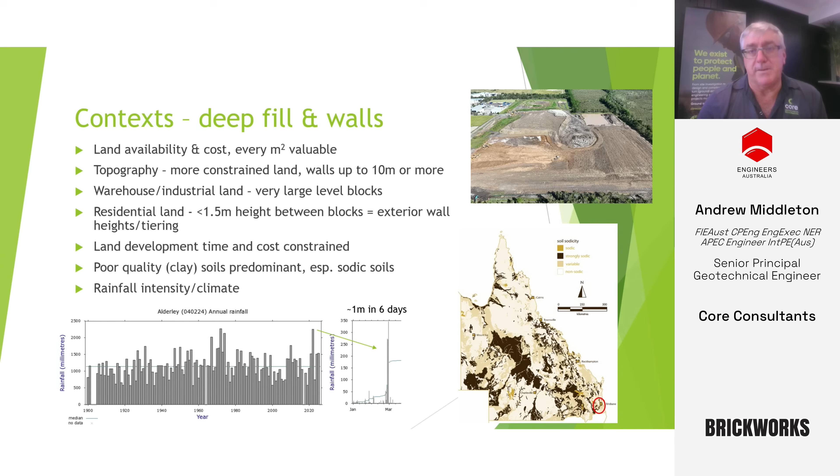So continuing to appreciate what it is we've got to allow for and design for, I would say don't get too comfortable - always remember nature. Nature's variable, and you just need to keep in mind those are the kind of things we need to be looking forward to. Design is about the future - they haven't built it yet, so we're looking a long way ahead. I think it's good to stay objective about this, and data is what keeps you objective.

In fill - typically you're building to your boundary, and we find that the land the toe of the wall sits next to is your neighbour's, not yours. So for walls in cut, the toe of the wall sits in your land in both cases, but in the case of cut, the land below the wall is yours. In the case of fill, it's not yours. This changes some things that you, your client, or your owners can practically manage in the future.

So the types of walls typically used are cantilever, sleeper, or post and panel. Obviously panels are becoming more popular than sleepers. More traditional, I suppose, is the cantilever concrete footing with blockwork or Dincel systems.

Your mass gravity walls - you can see a selection of those - come in either natural facing, cut sandstone, or in the case of Brisbane, granite. There's a significant granite supply available. Then you get your engineered walls with the big, large block format facing blocks. There's a number of products out there in the market, and then you get your mechanically stabilised earth - MSEs - the GeoGrid products, which go in combination with some or even potentially all of these, apart from sleepers.

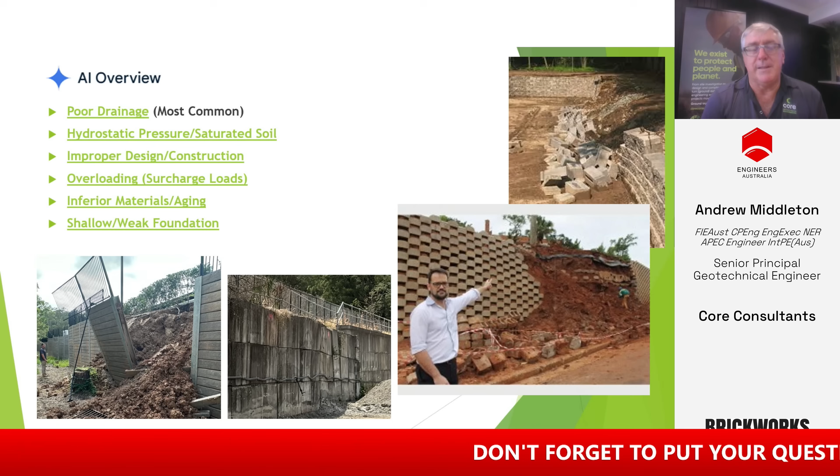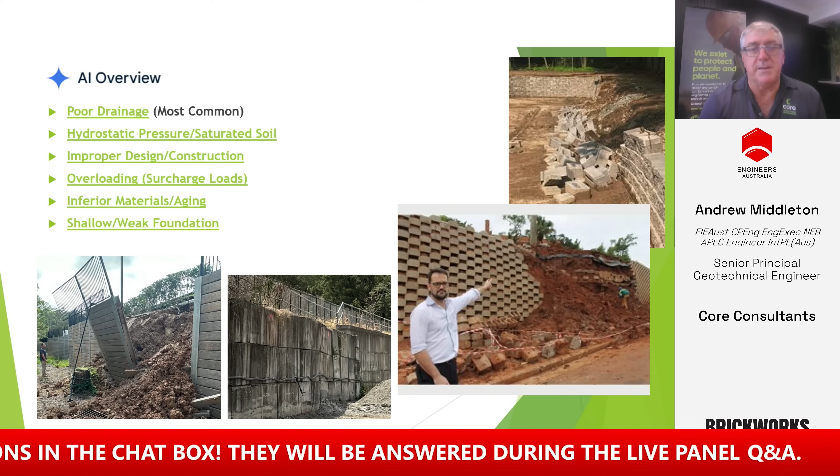You can see a couple of little failures there, and you can see the gentleman - that's actually not from Australia, and that gentleman is a politician, and you can see he's educating all of us about a big wall failure that's occurred. Slow news day perhaps, I don't know. Anyway, it will make the news, and we don't want that to happen.

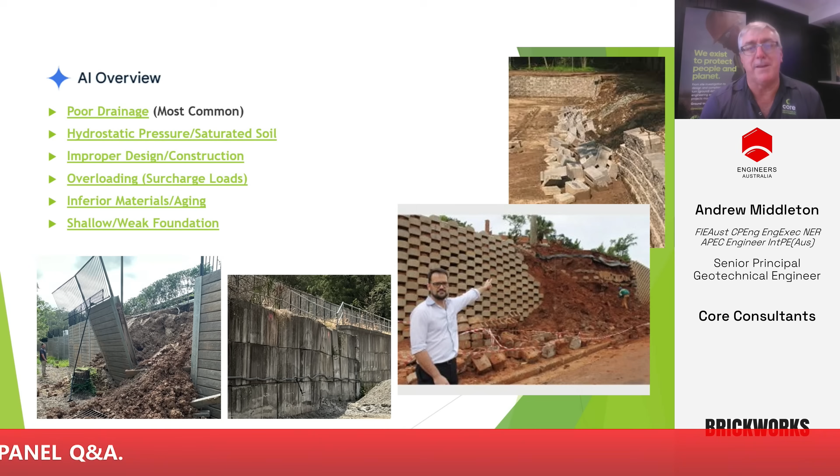Okay, wall design - AS4678 has a great summary. There's eight different modes you need to consider: 5 in terms of ultimate limit state, or failure modes, and another 3 in terms of serviceability. Wall design - I don't know too many other aspects of engineering that have so many aspects you need to consider. Wall design is not simple, it's not easy.

It includes an interaction between both structural elements and soil, so it's quite significant engineering work. As you get big walls, you get very, very big loads - I think these are amongst some of the most significant engineering structures that get built.

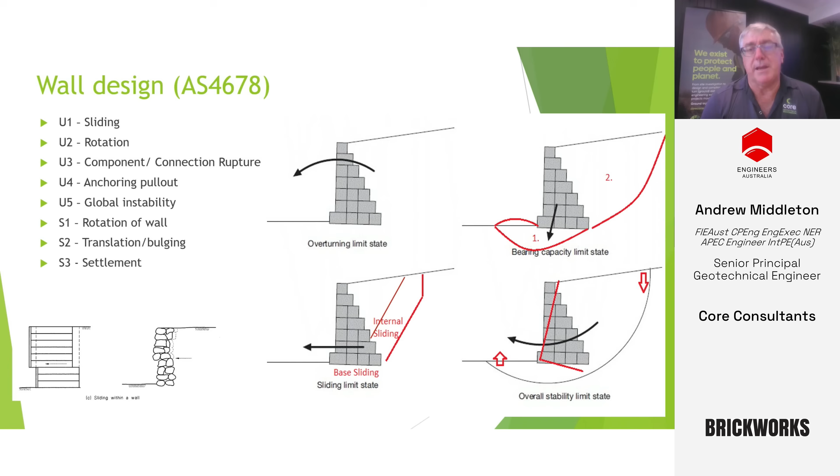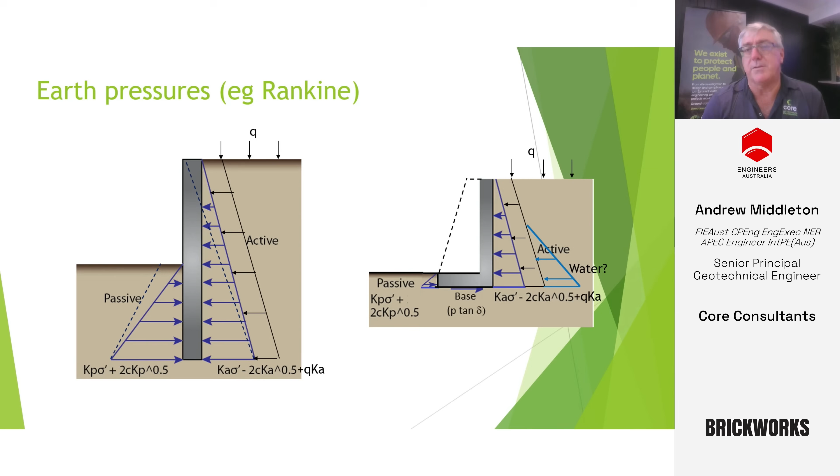Again, just basic earth pressure theory - passive on the leading side of, say, a cantilever wall, active earth pressure on the back, provided the wall can move. If the wall's restrained from moving, you'd use at-rest pressures, which are higher. There's an increase due to surcharging and whether or not there's water. At a high level, typically for mass gravity type walls, you've got sliding - nothing new there, just giving that summary to look at what we've got.

So one of the things about failures is we often get to do testing, and my guess is it's 10 times the testing you would do for the original investigation and design.

So again, as I say, we have to be careful about judging others in retrospect, because with the benefit of both hindsight and lots of testing, it's easy to do that.

I'll just note this is an issue certainly for Queensland tertiary soils in Brisbane, or tertiary rocks, very poorly consolidated, fissuring and micro fissuring type blocky structure means you get very low cohesion. Just have to be aware of that.

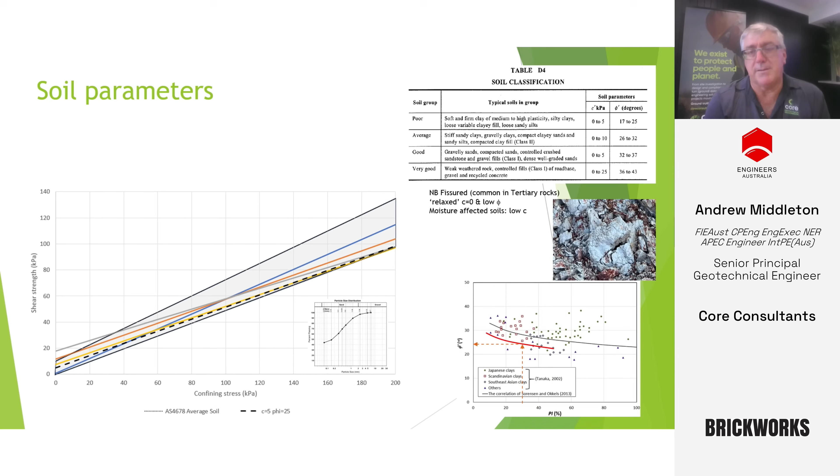Obviously, if soils get wet. The other thing we're able to usefully learn from this project is there's a correlation from Sorensen and others on friction angle with plasticity index. What we've found is that for us, at least in our Brisbane soil, it slightly overestimates. But again, it does show there's a reasonable field correlation there. Not a bad way, if you've got data, to start to make some reasonable estimates. So obviously, the table from AS 4678 is always a good guide. Wouldn't go far from that at all.

A lot of embankments, a lot of cut slopes stand up in the short term because of these suction pressures. But of course, as water becomes available potentially to that suction, the suction will draw in water, the suction will dissipate, and there'll be a loss of that apparent strength, apparent cohesion with that, and you need to account for that.

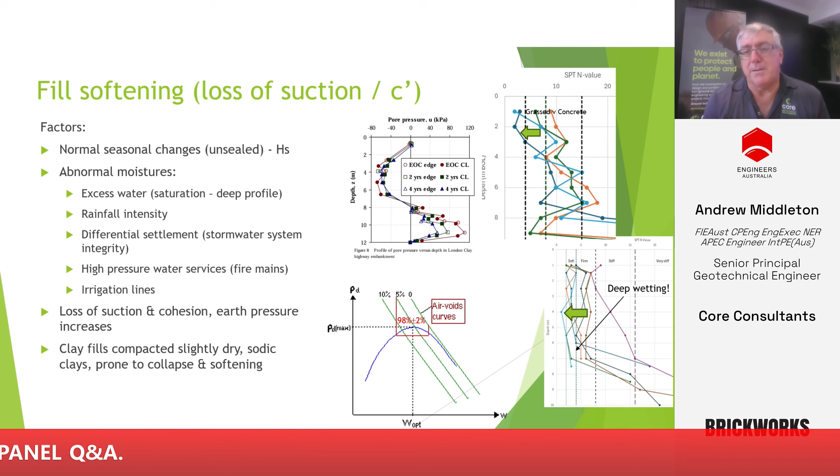Fire mains are a major contributor to problems in clay fills. Again, differential movement as earth pressures take up potentially leads to that. There are circumstances where there's been unmonitored water use in fire mains and significant volumes discharged over a period of many weeks, and it only became evident when the wall had a problem that something was going on.

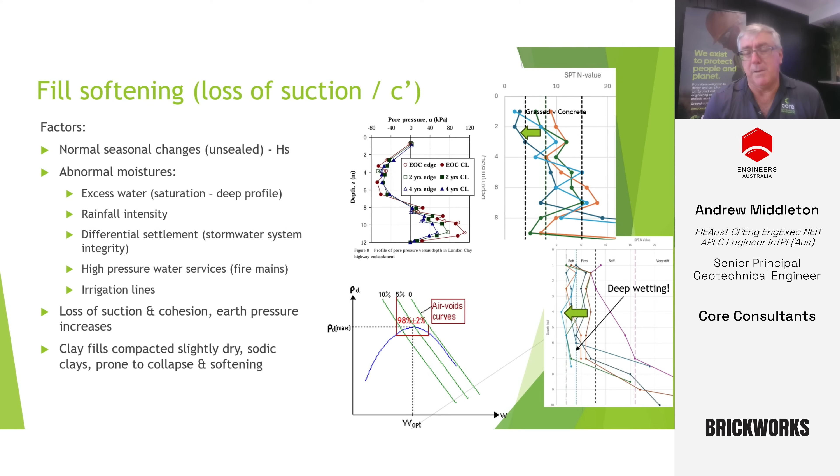As I've said, with increasing moisture, you get loss of suction and your earth pressures go up. You need to either reasonably allow for that or try to ensure there are measures in place that prevent it affecting the wall. I've mentioned the clay fills and sodic soils.

So for wall movements, we've got some really good data from a particular project where a 4-metre high wall moved. You can see the effect of the movement there—joints opened, the concrete moved away from the asphalt in the driveway. What's interesting is different parts of the wall moved differently. One end, which is the lower chainages, was quite stiff with very little movement. Further along the wall, it increased to about 0.5% of wall height.

What was also really useful is they monitored and took readings, as a very diligent client wanting to ensure they didn't affect their neighbour. We found it was about 100 days for those movements to fully develop—that's the dissipation of the soil suctions. In terms of earth pressure theory, that's the development from at-rest pressures up towards closer to active pressure, with the wall taking up movement and the soil relaxing.

So this has been really useful to show that walls shouldn't move more than 0.5% because of safety factors, but they can move up to 1%, and that's a real number, it will happen. Occasionally, if suctions are maintained, you won't see much movement, and you get comfortable with that, but you need to be aware that it does happen. It's a real thing.

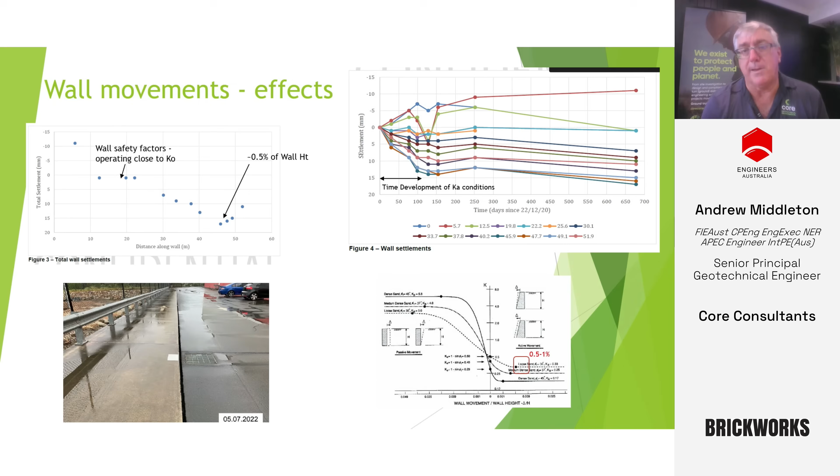With movement, stormwater pipes are prone to issues, as are fire mains. Stormwater pipes are bedded with bedding gravel and are large diameter, so they're essentially great big subsoil drains. We strongly recommend using an ag drain in the bedding gravel that discharges into access pits at the end, to the shafts. For blinding of that layer, if it's a high risk situation with potential to affect a wall, I'd recommend blinding as well, to help mitigate the risk of movement causing joints to open up.

Remember, vertical settlement will happen anyway—that's just normal. Well compacted clay fills settle upwards of 0.5% of their thickness, potentially towards 1% of their thickness. If the shaft is bedded at a different level to the pipe, you're going to have differential movement.

The other thing is the potential to use smart technology to monitor water use and have some sort of alert system. Maintenance people aren't necessarily aware of why this matters, but having alert systems that indicate, say, a fire system or irrigation system is using an unusual amount of water—and getting that to people who know what it means, investigating those issues quickly and dealing with them promptly.

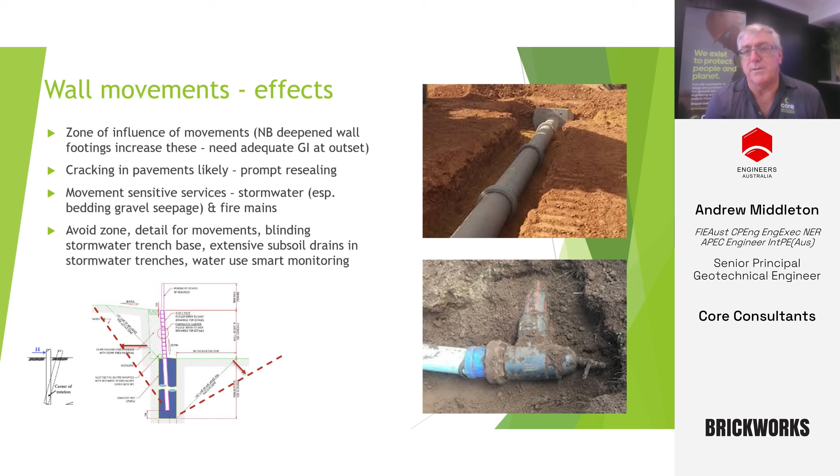I think the other aspect is ensuring that when there is movement at the surface—joints in pavements or opening up of joints in concrete—those are promptly dealt with.

It becomes really critical once you get above a certain size of sandstone blocks or boulders that you can practically manage with most machines, given the constraints of construction site access and truck movements. Once you get over about 4 to 5, maybe 6 metres, we find the statics really starts to struggle, and you've got to take other measures or really care to ensure this is actually going to work.

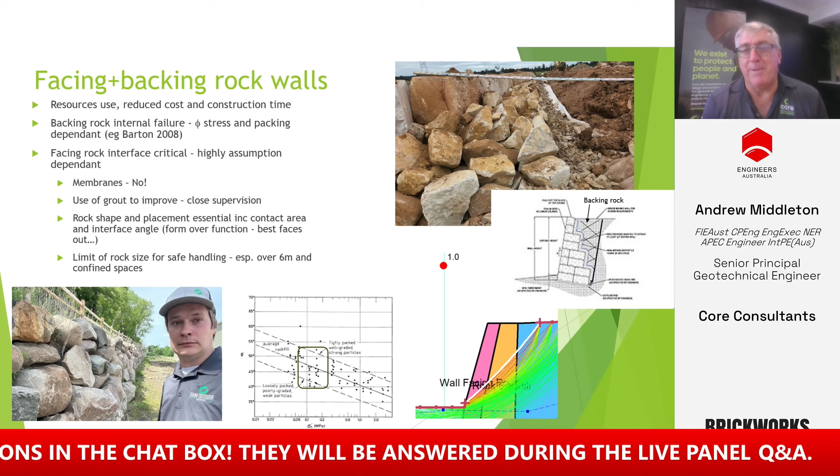There is an example I've seen where a geomembrane, HDPE, was placed between rocks. I probably don't need to say, but friction doesn't work very well on HDPE. I think that was kind of an obvious one, but nobody picked it up. And of course, it was found out pretty fast. Rain found that one out pretty quick. Fortunately, during construction, it was never going to last. So simple things like that you would imagine are obvious, but maybe not so much to others.

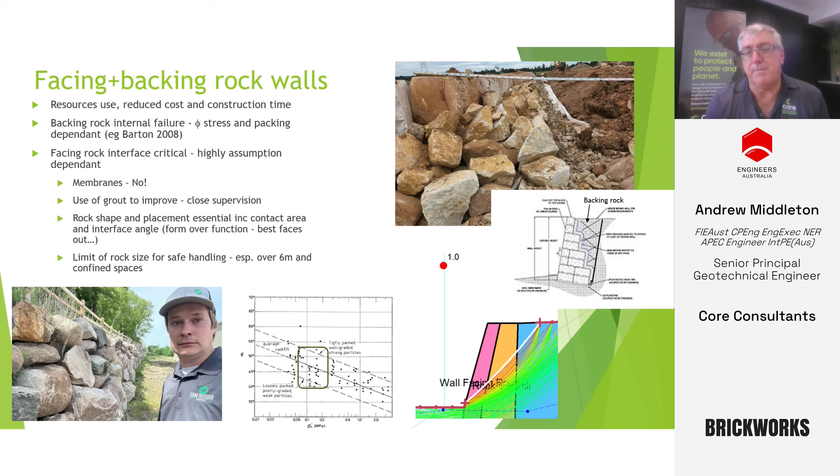I've also shared that I found Barton produced a good paper on rock fill density and friction angle, and it shows some variation for different confining stresses. Obviously you get higher stress—this is from rock fill dams. I found that quite a useful way to have a more informed decision about what parameters you should use if you're going to use this rock fill method.

Sodic soils are especially sensitive to this. They will also do that.

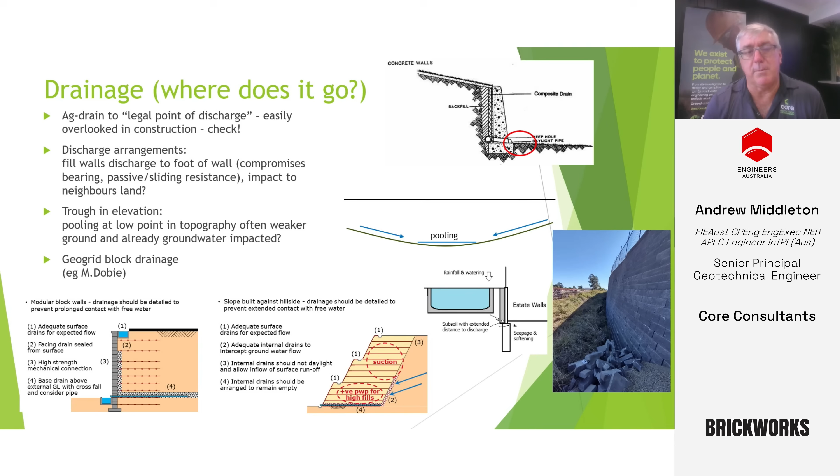Commonly, 150 or maybe 200 UCs are used, perhaps in a 450 diameter pier. The bending capacity of those is very low. And if you apply that into Broms' long pile theory, you'll find that the capacity of that pile is very, very small compared to the earth pressures.

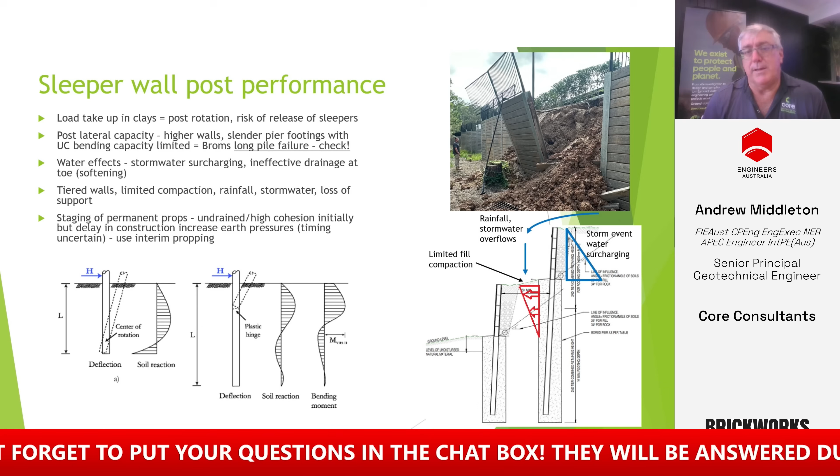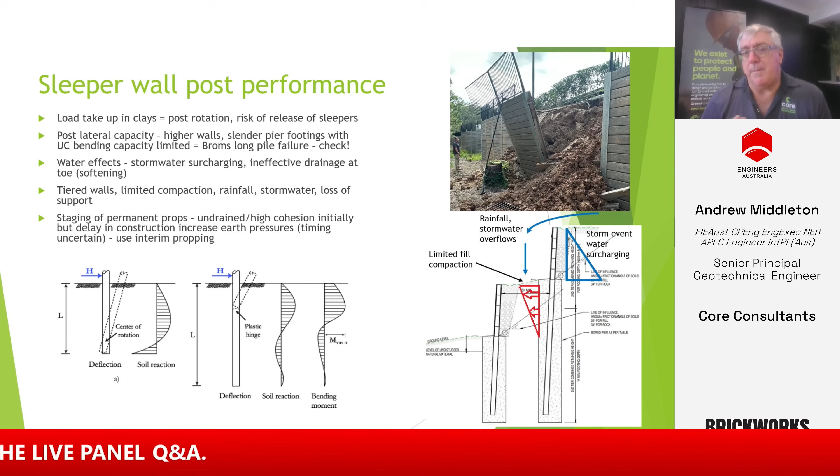Where this becomes even more of a concern is in a tiered wall, where the upper wall is doing a lot of work and may not be getting much support from the ground—the backfill behind the lower wall may not be very good. You can imagine what happens: the position of maximum moment moves down, the moment increases because you've now got a longer moment arm, picking up more earth pressure load. Things could go bad quite quickly in that respect.

I'm not a structural engineer, but I really think there needs to be more thought given to full cage reinforcement for these piles to significantly increase their capacity.

Tiered walls—the other thing we've seen is stormwater. A number of these walls have problems during construction, often because uncontrolled discharge of stormwater goes to the walls, down the back of the wall. The drainage systems behind the walls are designed for seepage, not for stormwater. Secondly, in a tiered wall, if it overtops, you're softening the ground in that middle tier, which probably hasn't had very high or effective compaction.

So with tiered sleeper walls, particularly that upper tier, don't miss it—really need to engineer that well to account for these kinds of conditions.

Another thing we've seen is a cantilever wall that has a permanent prop in the form of the slab for the structure from the pavement, using it as a permanent prop. But during construction, in the interim, no prop was applied. As delays in construction occurred, the wall—well beyond its capacity—the cantilever started to move, and emergency propping was needed. To me, if you need propping, you need propping.

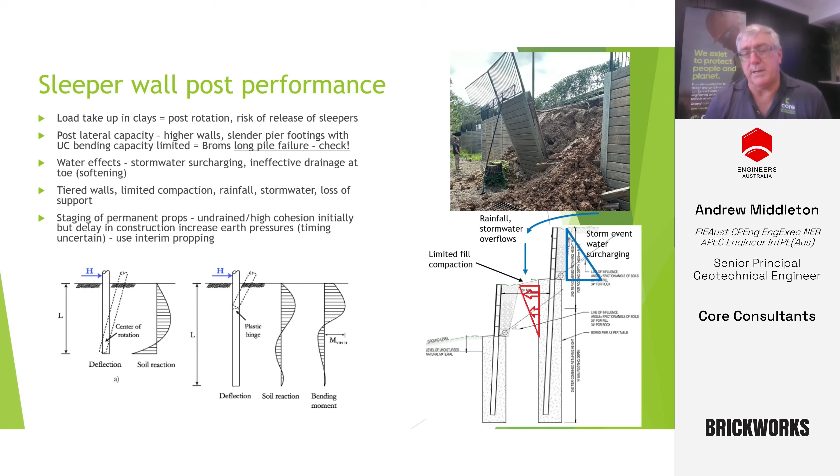So put in interim propping. I know there's an inconvenience factor, but you're probably talking about big walls, and what's a lot more inconvenient than propping is a problem with the wall affecting you or particularly your neighbour. So I think that's a case of be careful.

So just in summary, things I think are better practice principles: for drainage, understand where it goes and make sure it gets built properly. Don't have a lax view of diligence about that—it's such an important factor, it doubles the load on a wall. Earth pressure acting like water pressure isn't the same as earth pressure, probably more in some cases, so make sure you get that right.

Water services are critical, particularly fire mains and major stormwater. They are high risk—you need to make sure those are really thought about in detail. Move them away if you can.

If you can't, put in these other measures. Surface water during construction, as I've said, you must divert surface water and have arrangements to avoid the walls, as walls are not intended to cope with that. Sleeper walls, long pile failures, as I've just said, check them out. Make sure you're comfortable that you've got that covered.

Tiered walls, obviously numbers of issues there that potentially things that you can't control need to be in mind. Rock walls, again, the facing-backing rock method - I think practically there's probably limits to what's doable with what's sizable, and after which I would probably say think about going to engineered type block systems, geogrid, for example.

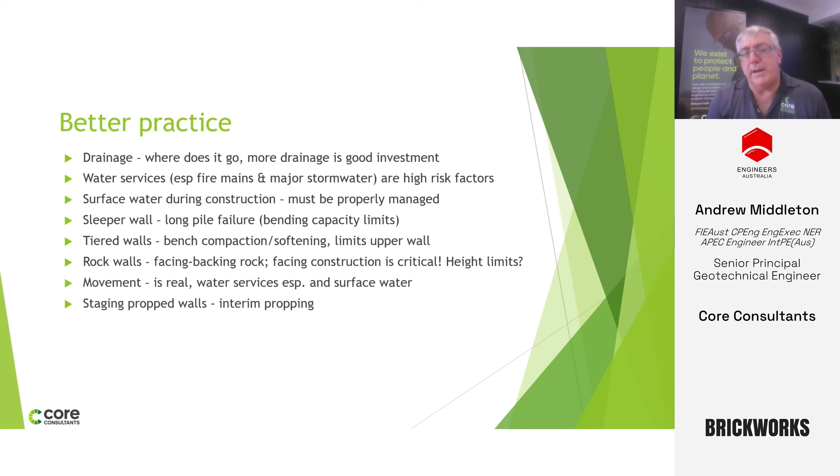Lateral movement is real, and again, settlement, compaction - looking at what you do to try and help ensure you've got better compaction around structures when you've got the wall and near wall, particularly back of walls. And again, the stage, as I said, interim propping.

Thanks very much for the introduction. I'll be talking about retaining wall failures today, talking a little bit about walls that are embedded into the ground, and an example here of a famous failure of a retaining wall in Singapore that happened several years ago.

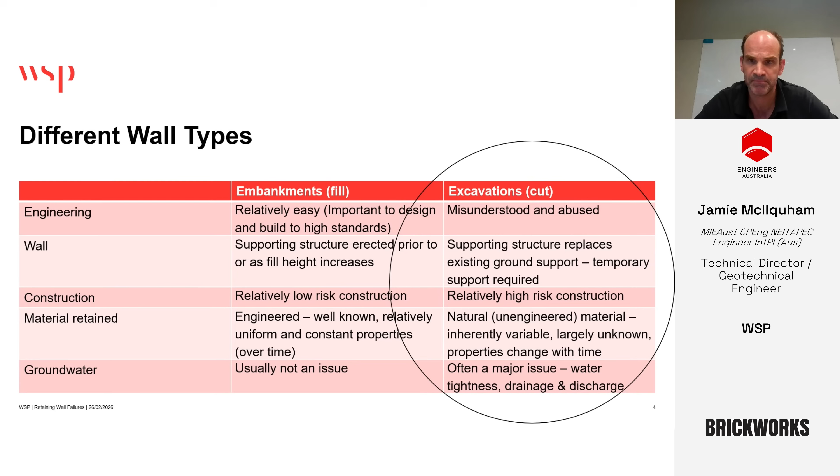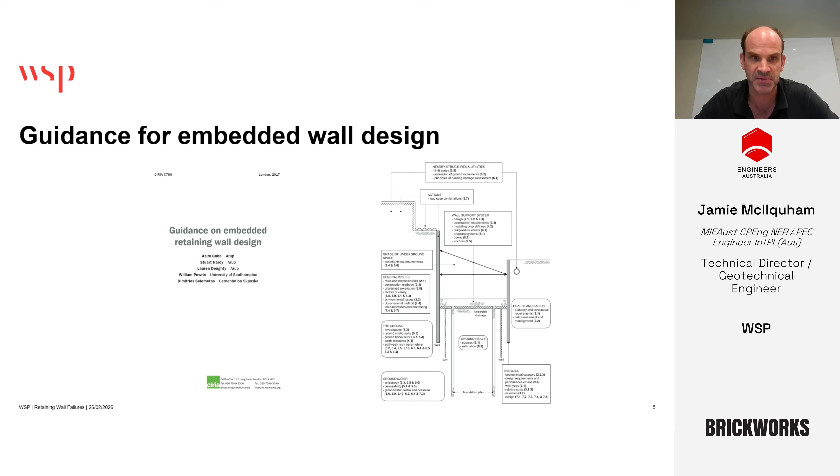There is very good guidance for embedded wall design. CIRIA C760 is a very good reference for anyone who is working in this field, and will cover in great detail a lot of the considerations we're going to walk through in this talk. So I'd certainly encourage anyone who's doing this type of work or wants to do this type of work to obtain and work through that guidance document.

As we've touched on already, embedded walls are a risky business. You are creating a void where the soil and water can move into it. And some of the failures that have occurred are a partial or full collapse of the excavation. There can be movement of the wall itself, and then if there's any structures or services near it, they can also move.

Groundwater inflow, depending on the ground you're in and the type of wall used, that can be something that can be pretty serious. And if water does start changing and you do have an impact on the groundwater regime outside the excavation, that can then cause other issues for any nearby services or structures.

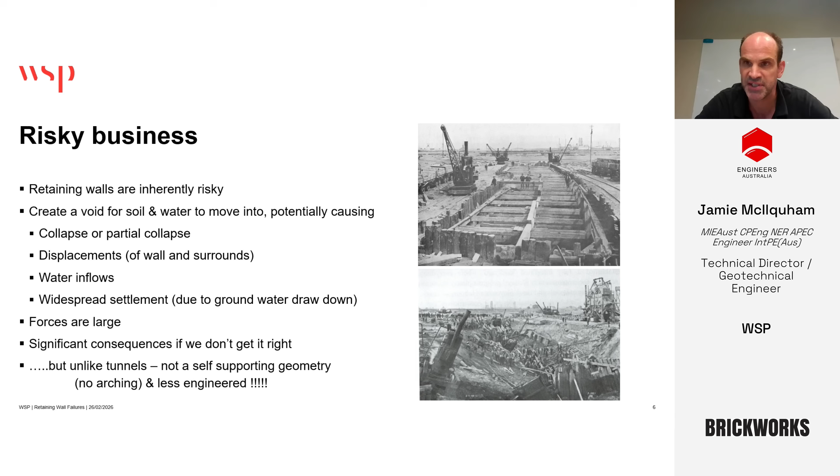So what's failure? It can range widely. There can be all sorts of different types of failures. It can be just unsatisfactory performance at any time in its design life.

But particularly, people tend to focus on failures that result in danger to life and damage to the wall itself or any nearby assets. So it could be a collapse or a partial collapse, impacting safety, as we saw in the previous slides, where people were killed in that historic example. That's generally where we will be doing stability checks, so ULS type calculations.

Serviceability often will govern the design. If there's too much movement, that's something that can happen quite commonly in failures. Something that needs to be thought through the whole process is how much movement is too much for the temporary structure itself, but also for nearby assets.

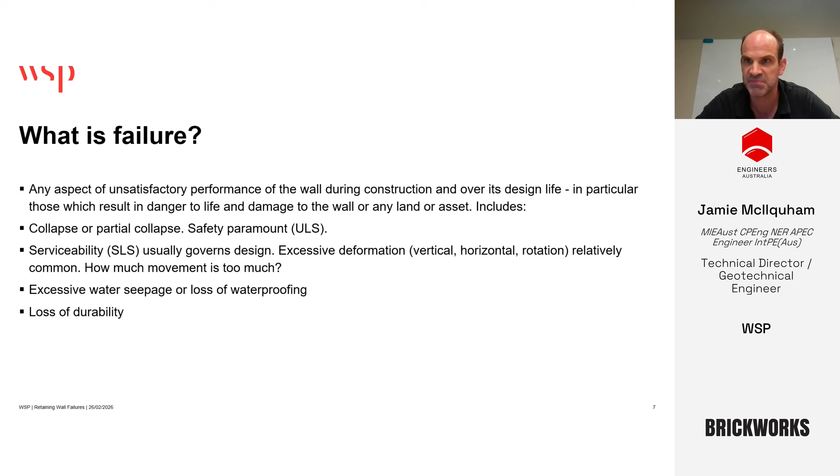Water ingress, too much water seepage can cause issues during the life of the permanent structure, or loss of waterproofing can lead to drainage issues and issues with what the client was expecting to receive versus what they actually achieve. Potentially a loss of durability of components used in the wall can also be a failure.

Now, why do retaining walls fail? The image on the right-hand side is from a journal written by Reason, who basically has the model of slices of cheese, with each slice being a barrier that could help stop a failure occurring. There'll generally be holes in the cheese that may move, and it's really when a number of things line up or a number of causes line up that the failure occurs. So what we have to try and do is make sure we have good design, construction, and supervision for retaining walls so that we avoid that happening.

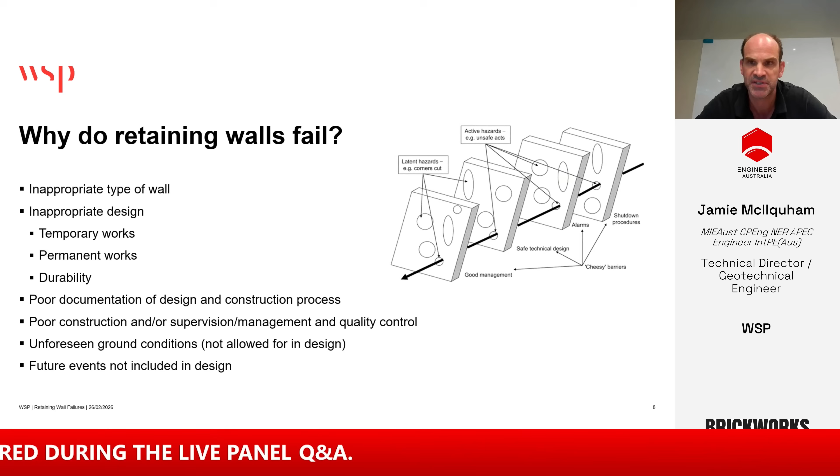So some of the reasons a retaining wall might fail, at a high level: an inappropriate type of wall chosen for the scenario; poor design, either for the temporary or permanent works; durability issues with components used to make the wall; sometimes poor documentation during the design and/or construction process; poor construction practice or poor supervision and quality control; potentially unforeseen ground conditions not allowed for in the design; and finally, things that could happen during construction or operation that haven't been allowed for in the design process.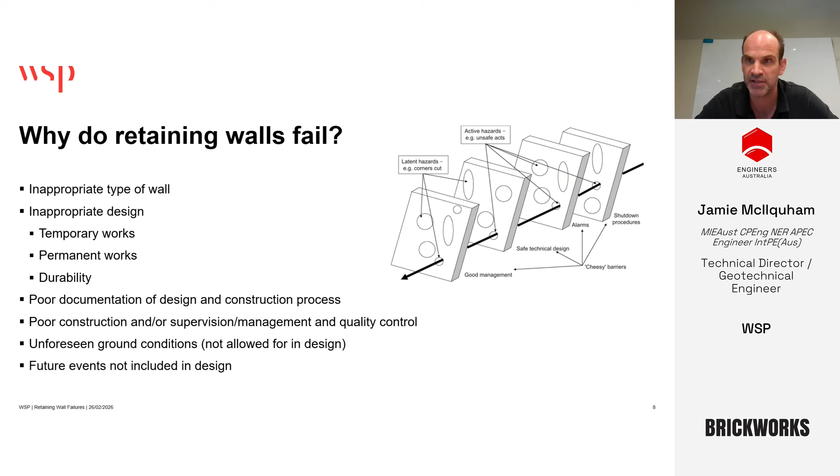Now, some of the things we need to consider when choosing which retaining wall to use: the design function or requirements - is it a fill embankment or a cut that we need? What durability requirements do we have? Where's the wall located, is it temporary or permanent? What design life are we trying to achieve? The stiffness of the system - how can the wall move and what impact do we need it to have on nearby assets? And water tightness - what are the requirements for that? Where is the groundwater level and what do we need to do?

Key questions mentioned before: are there nearby assets? Can it be constructed safely? Cost is obviously a major driver in a lot of circumstances. Really, overall, the key questions I would ask myself when thinking about retaining walls are: what am I going to do to the ground, and how is the ground going to respond? If you can answer those two questions, you're a good way towards a good design.

So the first question, what will I do to the ground? Some of this goes back to basics in a lot of ways, but it's important to get those fundamentals right. If we excavate into the ground, that excavation process is unloading the ground. If we're filling for a retaining wall above ground, we're loading the ground. Both of those will result in good things and bad things.

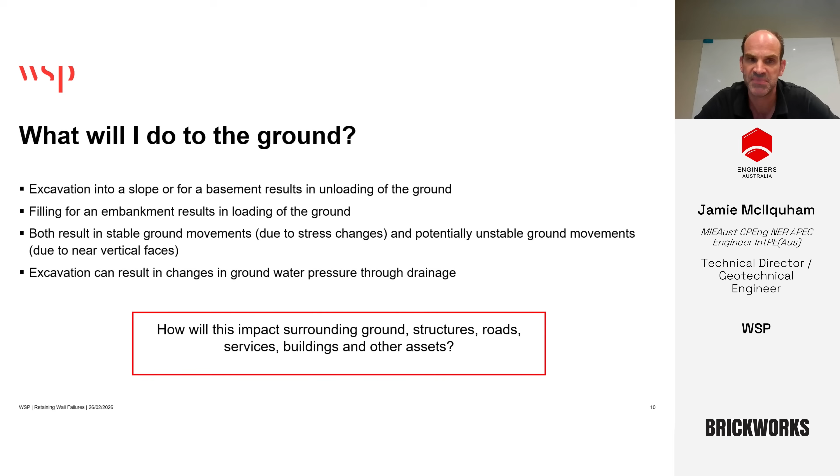And so how will these impacts affect surrounding buildings, services, roads, and other assets that may be nearby? That's a key thing we have to assess.

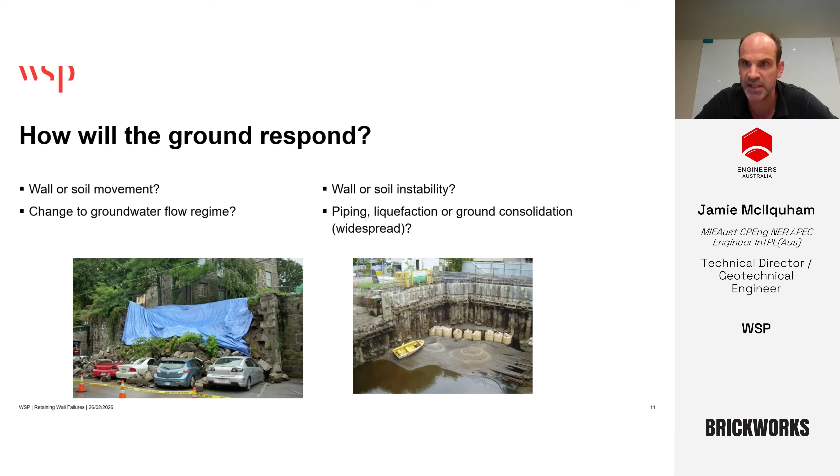How will the ground respond? Will wall or soil move? Will wall or soil become unstable as a result of the excavation? Will there be changes to the groundwater flow regime? What does that mean? How much water is coming in? Will there be drawdown outside the excavation? Some of those impacts from groundwater can be significant—they can lead to piping, liquefaction, or broader ground consolidation, and they can impact areas quite far away from the actual excavation. So it does warrant careful thought.

As we're all aware, stratigraphy in the ground is not going to be horizontal, it's not going to be 2D. Take an example of an anchored excavation where there could be changes in ground level. The groundwater level may vary across your excavation, and there can be quite large changes in depth to rock. Depending on the construction method you use, you may have soils that appear similar to rock for some techniques. So some key things there: where are the perimeter walls founded? How can you be sure that you're in the founding strata you're aiming for?

You might have unbalanced forces on either side of your excavation. There could be a river nearby, which can result in changes to both surface and groundwater levels. So things can quickly get quite complicated, and we need to keep that variation in mind. Often we won't have a large number of boreholes potentially with which to do the design. There may be restrictions on where they can be carried out—we may need to work within an existing building, or not. So all of that needs to be pulled together to get a good understanding of the geology and the ground model before we get too far.

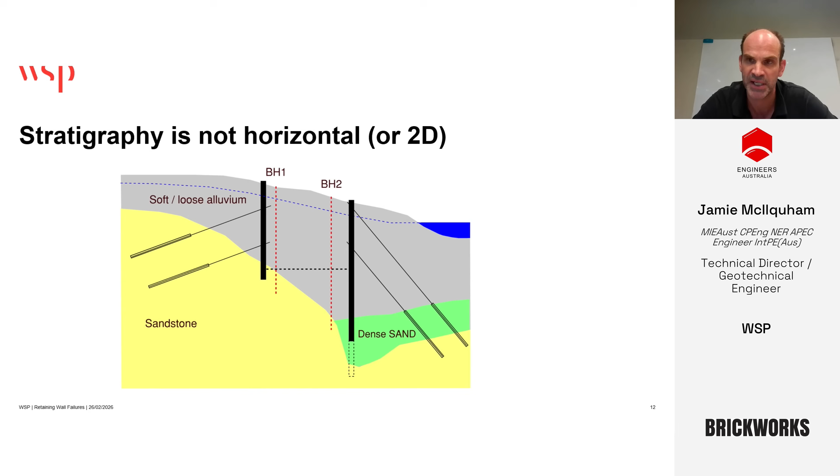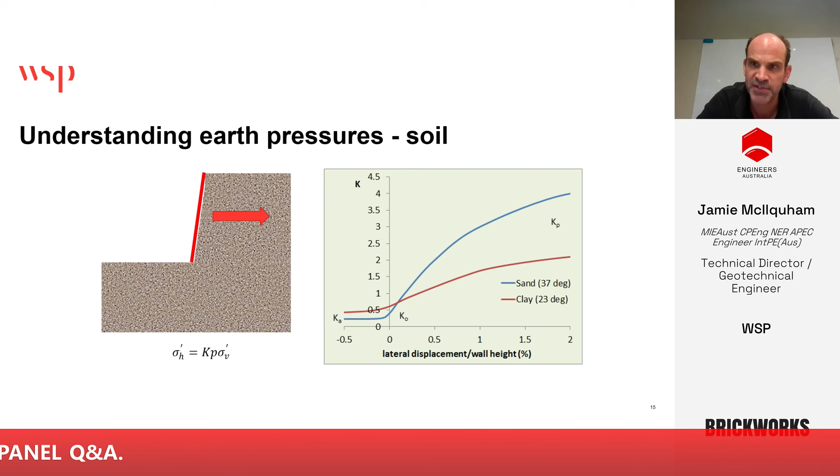The alternative is if we have a wall that moves towards the soil, then there will be an increase in pressure, which means we move to the right-hand side of the graph. Again, depending on the soil type, there'll be a change in pressure. But you can see on the graph that quite large movements—even larger than some shown here—may need to occur before we mobilize that force. So understanding the response of the ground and what movement is needed to generate those forces is a really important factor.

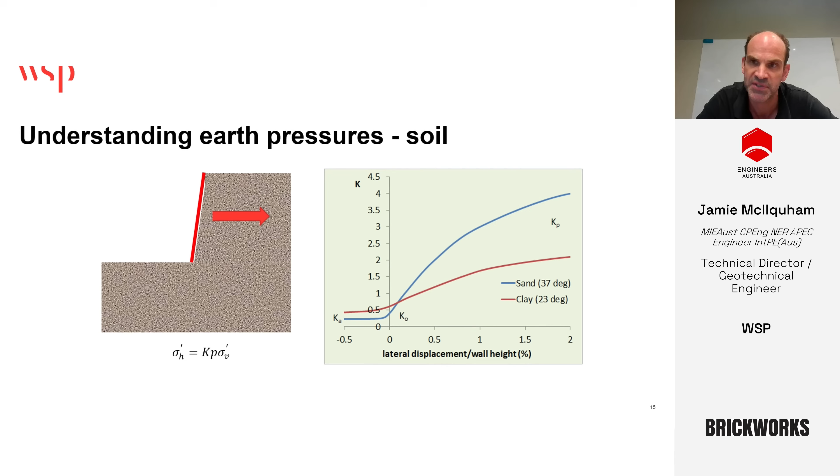That's something that quite often may have occurred in some of the failures we'll talk about a little bit later for embedded walls, particularly with sensitive assets close to the excavation itself.

Some other fundamental assumptions we bring into retaining wall design are around soil strength, stiffness, and earth pressure. As we talked about before, K0 is not a soil property—it depends on the stress history of the ground and the geometry we have. It will be between Ka and Kp, and K0 is not usually known. In soils, because they have a relatively low stiffness, it means usually quite large movements may be needed to change the stress state, as we just saw. We'll need some movement to happen to reduce the pressures down to Ka if the wall is moving away from the soil, and very large movements to generate passive pressures if the wall is moving towards the soil.

Now, the bounding properties can usually be reasonably estimated from drained strength parameters, though that does need quite high quality strength testing to be carried out. The other method commonly used is to use correlations from other tests, like plasticity of clay. But once you get into very soft or soft clays, you do need to be careful in assessing those values.

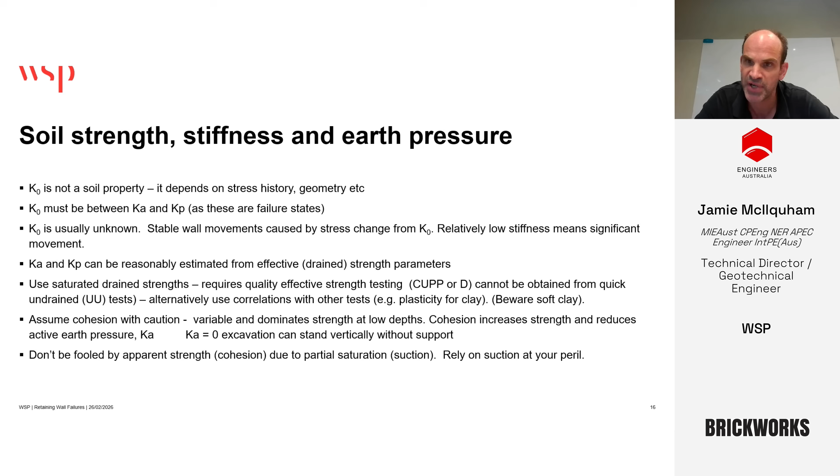The other thing we have to be careful about is apparent cohesion due to suction. That's something that can change quite quickly and can lead to collapses, particularly in situations like open trenches. So it is something that I would encourage you to be very wary of.

If we move on to rock, often excavations will pass down through soil into rock units. K0 isn't a property, or the pressure within rocks is not necessarily a property similar to soil, and it can vary with direction and location. In Melbourne, there's a difference in some of the pressures within the siltstones, and there'll be a higher stress in the east-west direction compared with north-south.

In Sydney, it's different again, with higher pressures again than in Melbourne. And there can be some quite high locked-in stresses in the sandstone in Sydney, with larger forces generally being in the north-northeast direction.

And those pressures will result in movement. The benefit with rock is that they do generally have a higher stiffness, and so maybe smaller movements than we would have for an equivalent situation in soil.

However, things to be careful of in rock is that it's really the planes of weakness and the major structure in rock that governs its behavior. So we do need to understand the bedding of the rocks. If there's a dipping in the bedding, then that's something that's really important in designing basements.

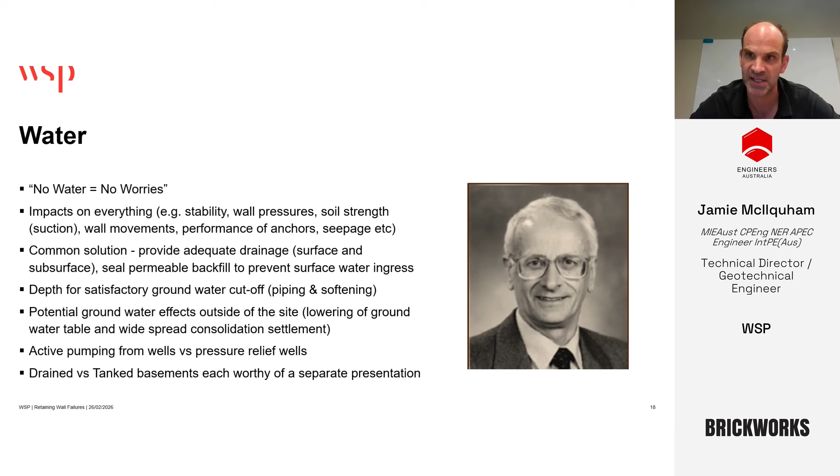Drained and tanked basements are both worthy of a separate presentation, but you do need to think about, for each of those situations, how the excavation will be sequenced and what the impact on groundwater will be. A topic in its own right.

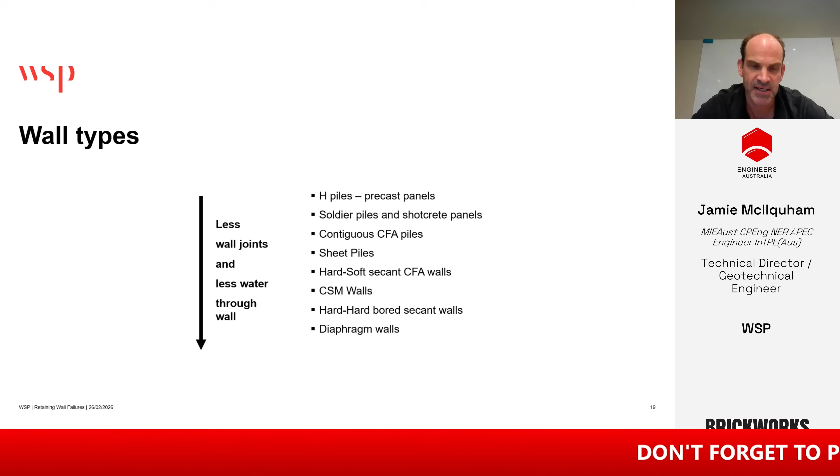Now, depending on how we want to try and manage water inflow into our excavation, there are a range of different wall types that can be used. There are some examples and case studies a little bit later that go through some of these. And as we move down the list that's shown there, there are fewer wall joints and less water will be able to get through the wall.

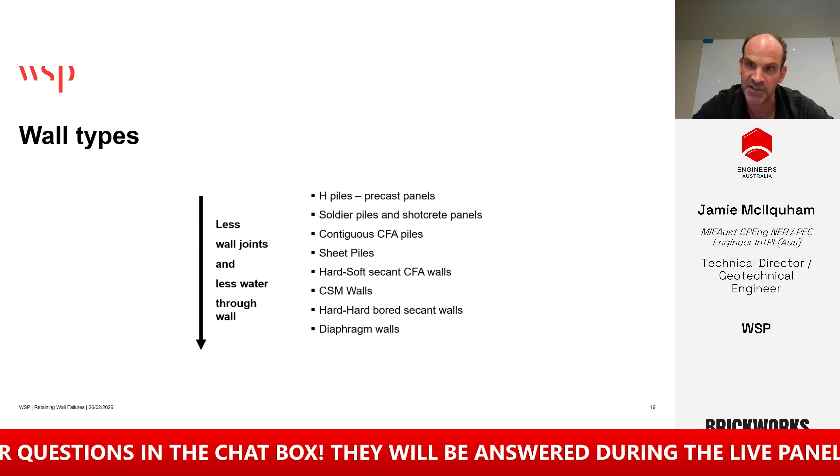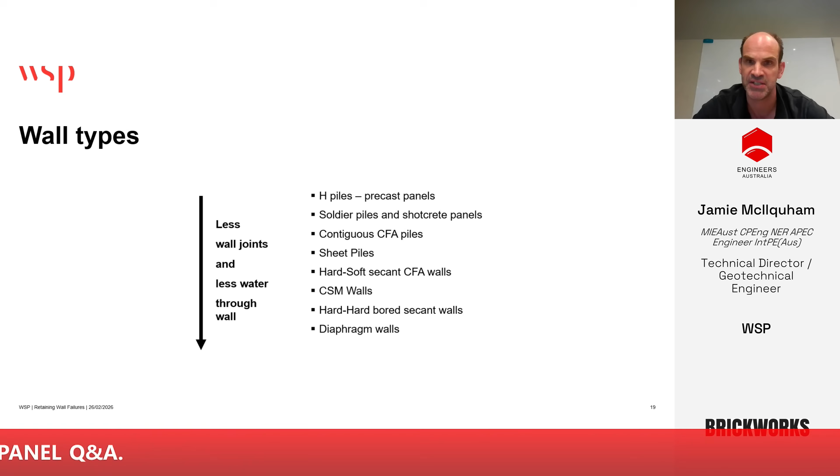You still need to work out where the wall is founded and whether there's potential for water to come up from units that are below the wall. But in terms of flow through the wall itself, D walls obviously are relatively tight. Some of the soldier piles and shotcrete or precast panel walls are relatively leaky.

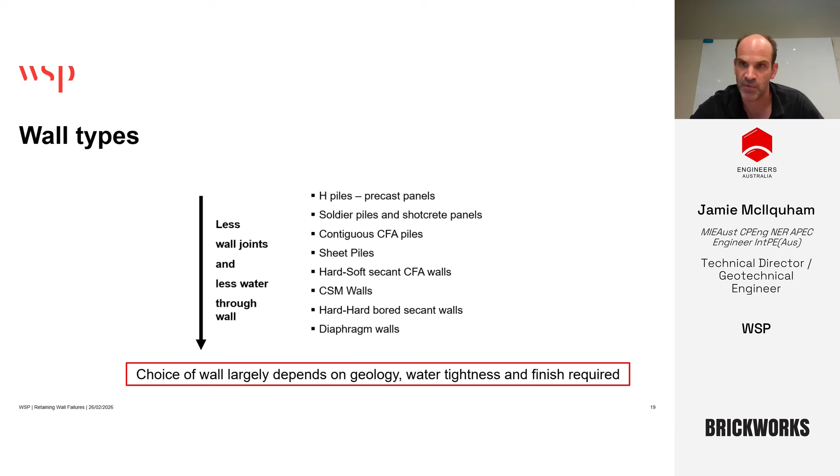So choosing the wall does depend on geology, depends on the water tightness you need, and it depends on the finish that the client is expecting.

Now, in terms of wall embedment, it's needed to achieve lateral stability. It's needed to achieve cutoff of water. It's needed for vertical stability, particularly if we are using ground anchors that are inclined. And base stability, again that's tied to the water inflow into the excavation.

Now, when we specify a founding layer for the perimeter walls or for a retaining wall, a key question is, how do you actually confirm that you're in the correct strata during construction? Because it's important to think about the consequences if embedment isn't achieved, and that could impact any of the items above we've just talked about.

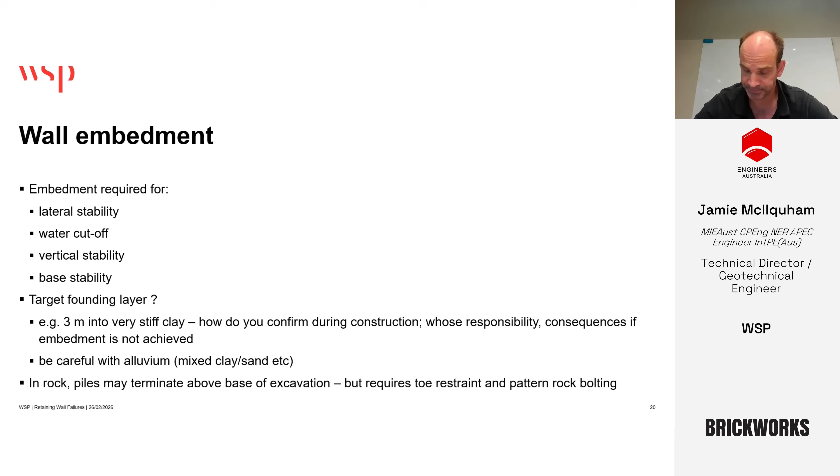You do need to be very careful in alluvial materials, which are by their nature very variable and saturated and can change quite quickly. In rock, piles don't necessarily always need to extend below the base of the excavation, but you do need to think about how the loads from those piles will be carried and how the rock below the piles will be supported.

Now, one of the topics that has led to basement failures, particularly with groundwater inflow, is around verticality of piles. AS 2159, the Australian Piling Code, does not cover retention piles, and there's no codified verticality standard for design. So do you warn your clients? In doing this, we do need to think about pile spacing and what contractors can actually achieve in the field.

The consequences of loss of verticality or misalignment can be architectural - the finish doesn't look great in a basement. You can lose overlap, which can lead to water flowing between the piles, and that can lead to seepage, piping, or soil loss. And worst case, you could result in a loss of basement space, either through having to have facing panels with additional drainage behind it, or if there's redesign, as we'll see in some cases a bit later, you may not be able to go as deep as you hoped with your excavation.

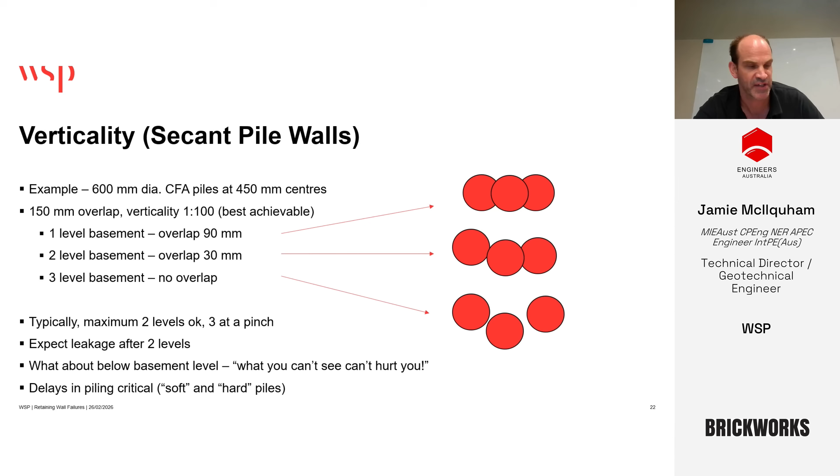And so the other thing, often the piles will be founded below the basement level, and it's still important to try and avoid water flow through the ground below the base, particularly if you had saturated sands. So a comment there, what you can't see can't hurt you, but you may see increased water flow in parts of a basement. The other thing that can happen with secant piles is if there's delays in piling between soft and hard piles, then that can also impact the verticality that can be achieved and the seal achieved between piles. So just something to think about when we're thinking about the piling method to be selected.

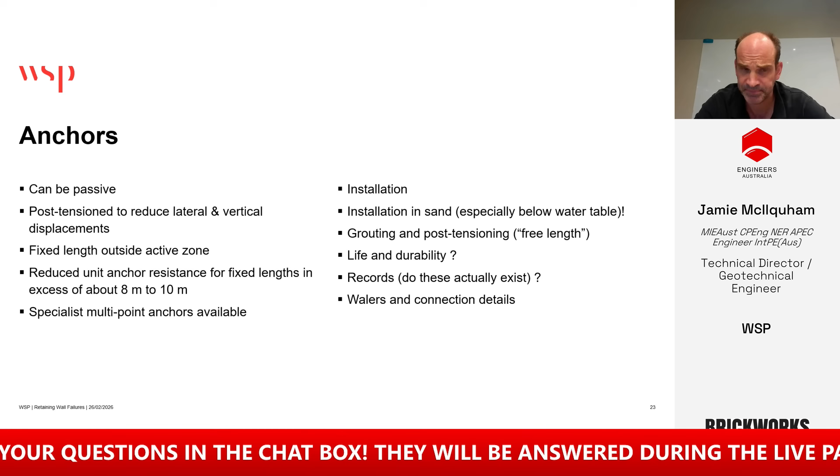Ground anchors are often used to support excavations. They can be passive or active. Quite often, if anchors are used, they are post-tensioned because that helps reduce movements. The fixed length of those anchors needs to be outside the active zone of the wall so that they are founded in stable materials. And once you go beyond about 8 or 10 meters in length, then the resistances that will be achieved are lower.

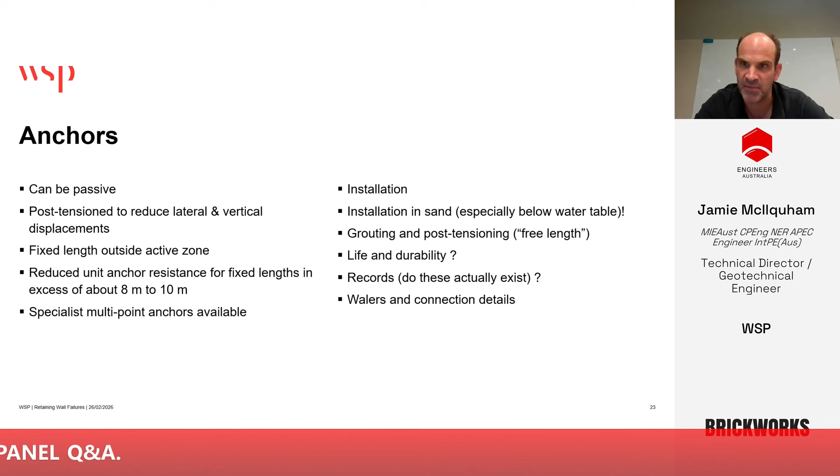However, there are single bore, multiple anchor options available that can be good if you're looking to try and spread the load over a longer length. Installation in sand, particularly below the water table, can be difficult. You may need temporary casing.

If you do try and install anchors without casing, then there are issues around having a separate free and fixed length. So we're looking to fix the anchors in at the end point of the anchor. If there isn't grouting in 2 stages, then potentially you lose the free length and you may be transferring load in part of the anchor that you were assuming does not, and that can lead to issues that we'll touch on a bit later.

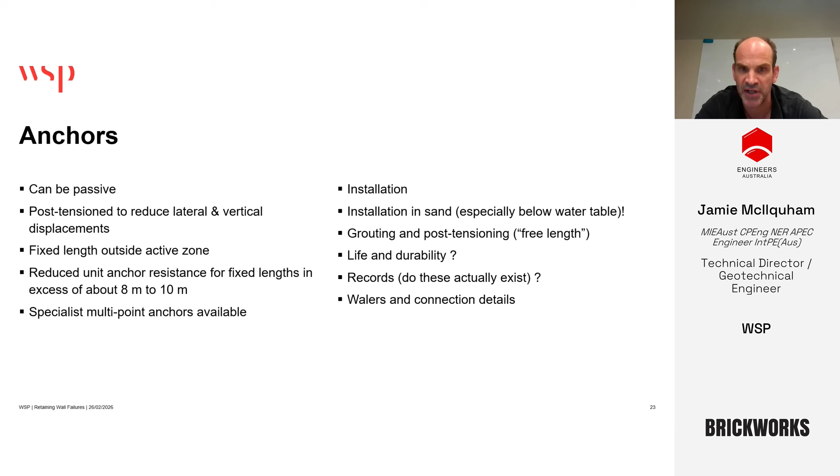The life and durability requirements for anchors, so how long they need to last, whether they're temporary or permanent. Records with anchors are varying quality. It is essential for anchors, particularly permanent anchors, that good details are kept of the drilling, testing, and finishing activities. And the waler and connection details that are used are also fundamentally important to their success.

Wall finish is something that is important to the client. It's what they're going to see when they walk into their completed basement. It's something that can cause disputes, particularly where somebody was expecting something but received something else.

Generally picking a cheaper piling or retention option will have a poorer finish. The different wall types discussed earlier are cheaper to install, but will have more water flow through them, leading to a poorer wall appearance. If you pick a poorer option, you may need a plenum wall with drainage hidden behind it, but you lose space in the basement as a result.

If the walls are out of alignment facing into the basement, you may lose space that you were thinking you had. So depending on the depth of the basement, more expensive options will sometimes result in a better finish and an overall better outcome for the client.

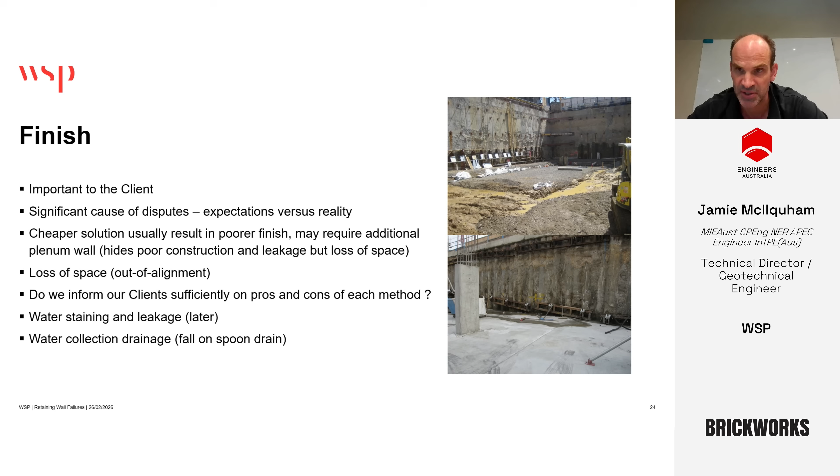There's obviously water staining and leakage that could occur later in the life of the basement, and you need to do something with the water that flows into the basement to manage and dispose of it.

In terms of support systems, anchors, or other methods of supporting basement walls, there are two general types of systems. Passive systems generate restraining force through movement. Similar to some of the graphs earlier in the presentation, they'll generally result in walls that move more and cause potentially greater impacts to adjacent properties.

If they are close to sensitive assets, they probably shouldn't be used. Examples could be gravity walls, cantilever walls, reinforced earth walls, and soil nail walls, which we won't touch on too much. But with any of those wall types, you really need to think about what's near them and what the impact of movement is going to be.

Where active systems are used, we use post-tensioning or jacking of props in some instances to help limit displacements.

The forces used need to be selected in order to control movement, so it's a movement control, and stability is maintained as well. These are generally designed to resist a higher earth pressure because we don't get movement of the walls to reduce the pressures down to the active state.

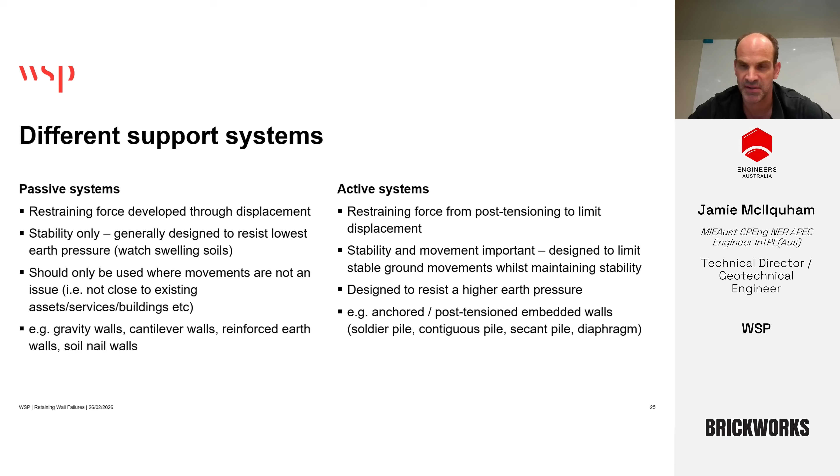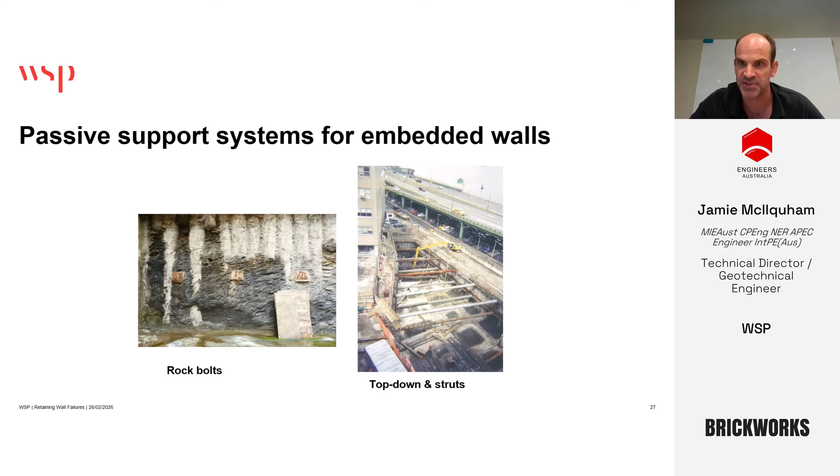Some of the passive support systems I touched on a couple of slides ago: rock bolts will need to move in order to generate the force they're assumed to have. Struts, if they are not hydraulic or able to be pre-stressed, will be a passive system, in that there'll need to be some movement of the walls in order to generate forces within those struts.

Some example pictures of anchored support systems for embedded walls. In terms of anchor forces, you do need to be careful with them. If you adopt anchor forces that are too high, you can try and pull the wall back into the soil, resulting in a move towards passive pressures and potentially higher forces acting on the wall. So it can be important not to have anchor forces that are too high. Ideally, we get them just right and a nice balance.

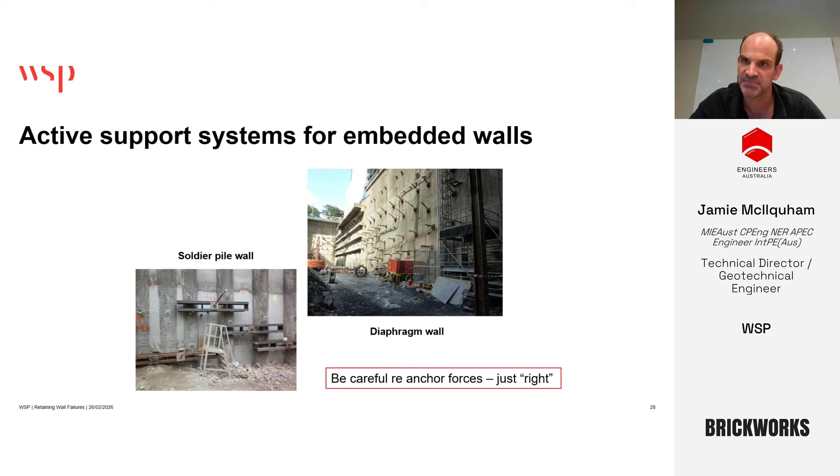So some of the things that we need to ensure during construction to make sure that things go well. Documentation needs to be detailed enough so that people can build the wall as it's been designed. Specifications need to be detailed and targeted on what's to be done.

And if there are any key construction stages, it's important that they are clearly described and shown so that people can understand the sequence that's been assumed.

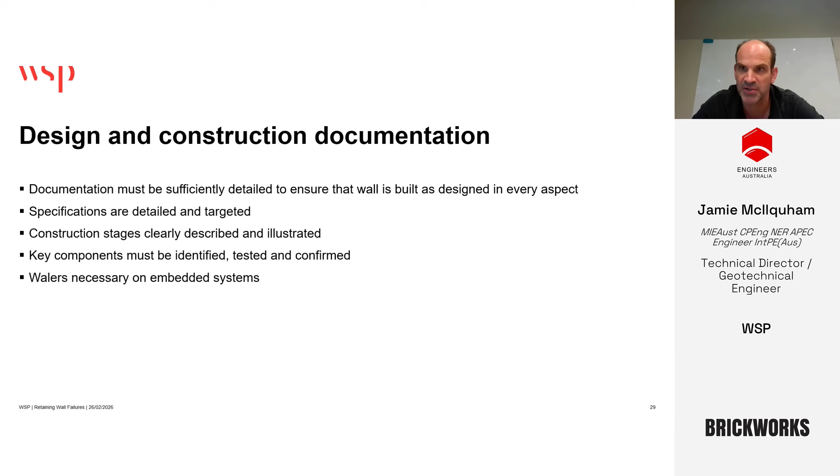So key components need to be identified, tested, and confirmed. Ground anchors are a good example—they should always be tested, and the records from them should be kept available as they are critical parts of the overall system. Likewise, pile construction records, toe levels, and confirmation of founding strata are all really critical to the performance of the system. And walers should be used on embedded systems where anchors are used.

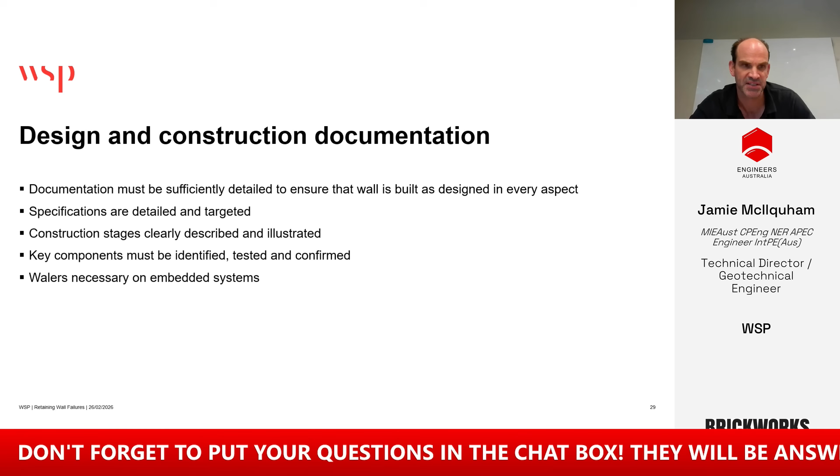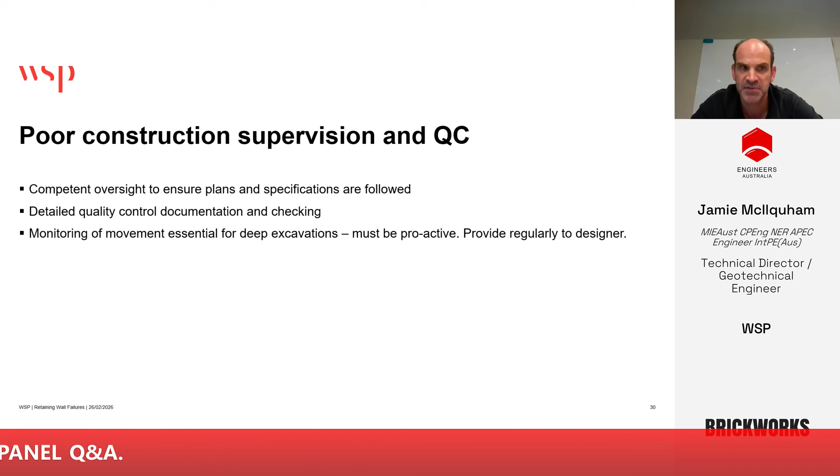So there are issues if construction supervision and QC is neglected. It's important to have people checking that the plans and specifications are being followed, and that where documents are produced, whether it's anchors or piles, they are documented, checked, and accurate.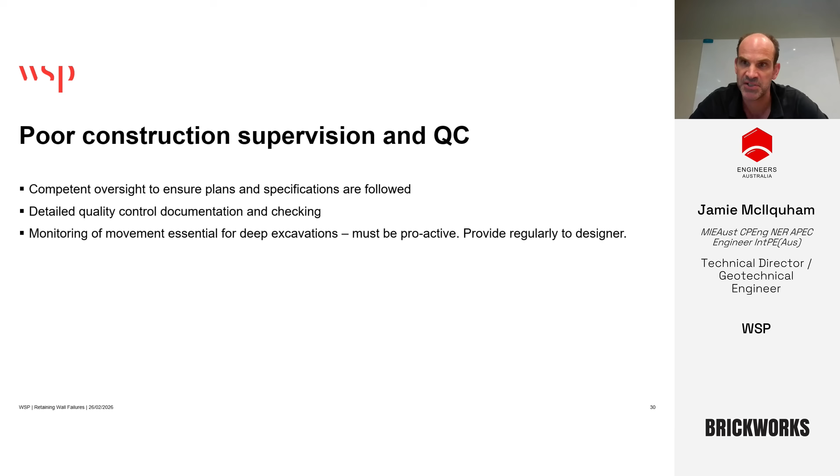Monitoring of movement is critical in deep excavations, and that should really be proactive and provided to the designer so that if there's unexpected behavior, it can be identified early and responded to. Ideally, there's a monitoring plan ahead of time to identify expected and unexpected behavior in order to take action to avoid issues, as I'll touch on in some examples shortly.

Unforeseen ground conditions is something that can lead to issues with retaining walls. But there is a question on what's truly unforeseen, or have we just done a poor investigation? In the past, movements of retaining walls have occurred due to low strength seams that are lower than reasonably expected. So there are cases that are out with normal experience.

You can have higher in-situ horizontal stresses than you'd expect. And what happens if you don't have any in-situ stress measurements? There could be ground conditions outside the site, or things have changed where you haven't managed to investigate. So ideally, you have a construction method that can be adjusted to capture those changes.

I mentioned earlier that sometimes there are future events that aren't included in the design. It could be a water main fails near the site and a groundwater level rise results. That's something that should be considered and designed for.

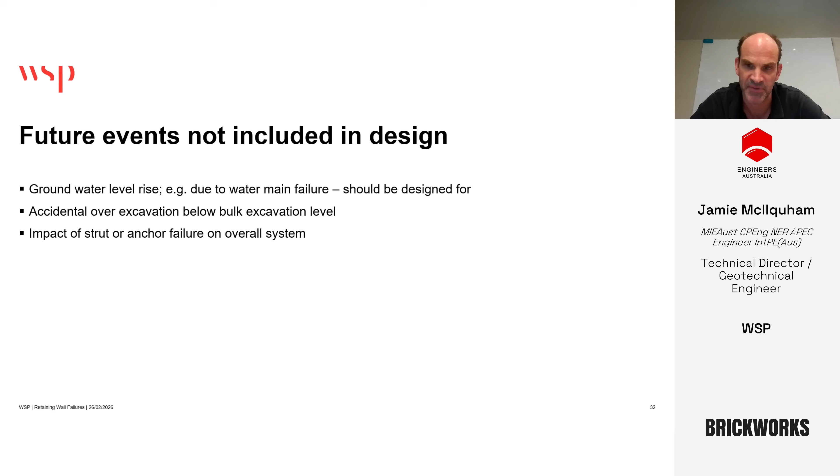Accidental over excavation is something that CIRIA talks about. And then the other thing is the impact of an individual strut or anchor failure on the overall system. Some of that came out of previous failures where the resilience of the overall system did not react well to the loss of an individual component. So that's something it's good to understand—the resilience of the overall system.

Going to run through some examples here of projects, both in Australia and overseas, with some examples of failures of retaining walls and generally what caused them. I've provided some information on each one, but not necessarily exactly where the site is.

There was one project where, as a result of poor anchor installation and over excavation, there was some wall movement that led to damage of some adjacent buildings. Work was stopped and an emergency order was placed on the excavation, which was only able to be recommenced after some temporary strutting was installed to help control the movements. So again, movement being a key thing, and something unexpected, the over excavation.

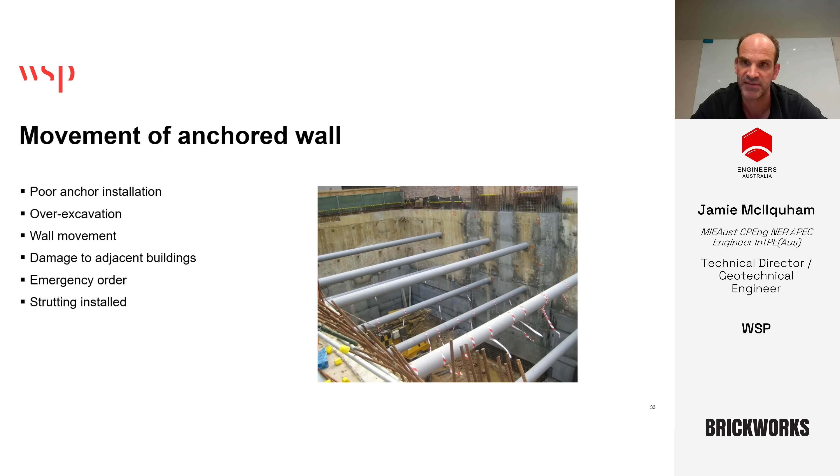On another project, there was a soil mix wall—one of the options down the lower end of the list in terms of water ingress, so quite a good option for that. In this example, there was a good site investigation and reasonable knowledge of the ground, but there were some optimistic assumptions in the assessment of ground anchor capacity and behavior.

It was a 2-level basement with a 6-meter retained height. At one stage in the project, the toe embedment of the wall was reduced from 6 meters to 4.5. Bar anchors were used to provide support to the wall, and they were installed into interbedded sand and clay alluvium.

After excavation commenced, there was 300 to 400 mil of horizontal wall movement. Emergency propping had to be installed, and the overall outcome was damage to some adjacent properties and pavements, and a redesign of the structure was needed because the wall had moved such that the superstructure had to be adjusted to allow for the new perimeter wall locations.

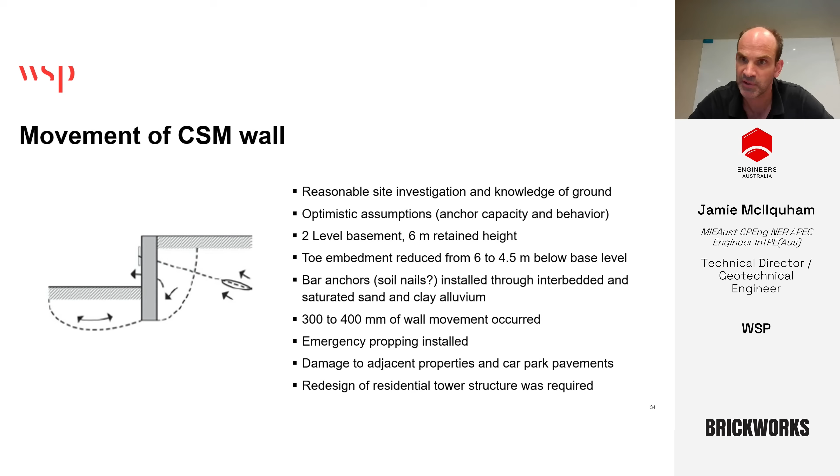The figure on the left is from the CIRIA document I mentioned earlier, and displays this as one of the mechanisms that should be assessed. So again, being careful about how anchors are modelled and making sure how they're modelled matches how they're built and how they'll perform.

This is an example of a basement in alluvium below the water table, similar geological conditions to the previous site. There was probably insufficient investigation and knowledge of the ground in this instance, and some optimistic parameters used for the soil, the anchor capacity, but also the pile verticality. As a result, there was insufficient pile overlap, and the pile embedment was too short.

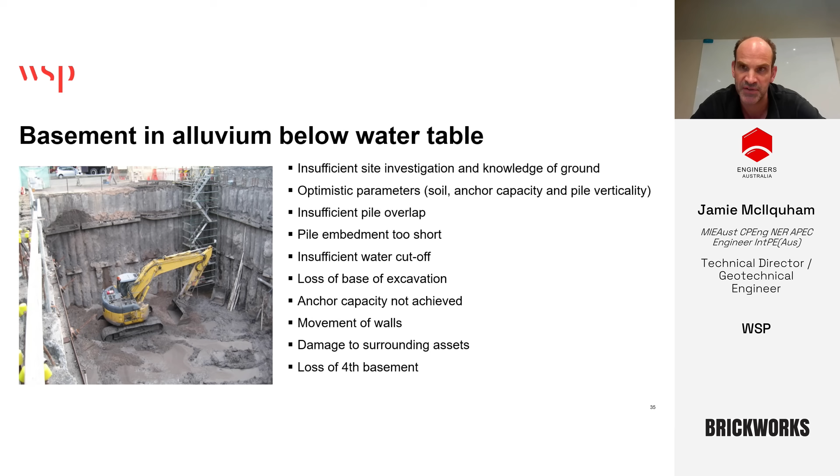There was significant water ingress and loss of base of the excavation. Anchor capacity was not achieved, and the walls moved, leading to damage to surrounding assets. As an overall outcome, the fourth basement level that was proposed originally was lost, resulting in impact to the structure, as well as damage to adjacent assets, which had to be addressed by the project team.

One thing with inclined anchors is that in pre-stressing those anchors, you are introducing a downward force into perimeter piles. So we need to be very careful about the socket of those piles, making sure they're socketed into stable ground that can take the vertical load. In the picture on the right, the material below the base of the pile, possibly debris from construction, was quite poor. That can lead, and did lead, to settlement of that pile and anchor relaxation, meaning less force in the anchors, which can lead to increased lateral movements as additional movement is needed to put tension back onto the anchor again.

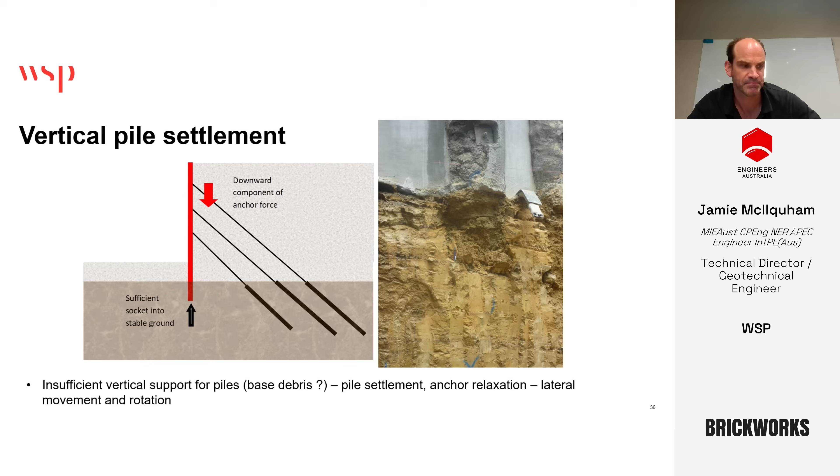You need to be careful if there's knowledge of areas of existing instability or landslips being prevalent, or geological conditions that may be conducive to landslips. Relatively small excavations could mobilize an existing slip, whether that's walls being embedded piles, or walls going up where a small excavation is needed. It's really important to identify those potential conditions in an area or on a site.

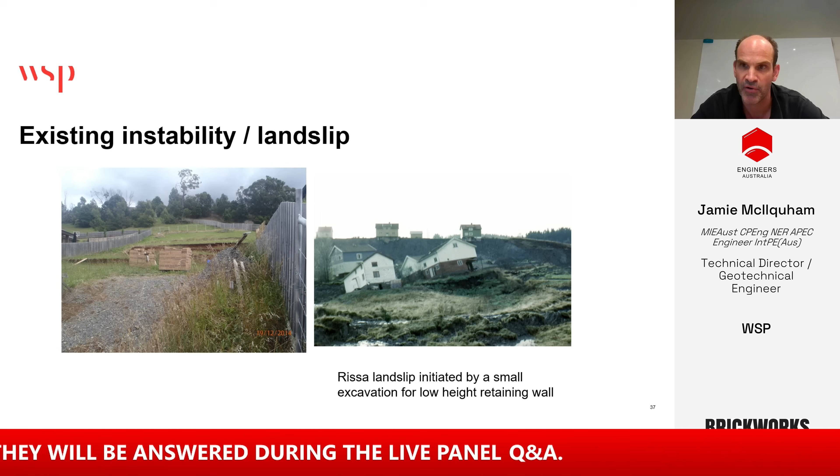A very large scale landslip, shown in the right-hand image, was initiated by a relatively small excavation for a low height wall and led to loss of a significant number of properties.

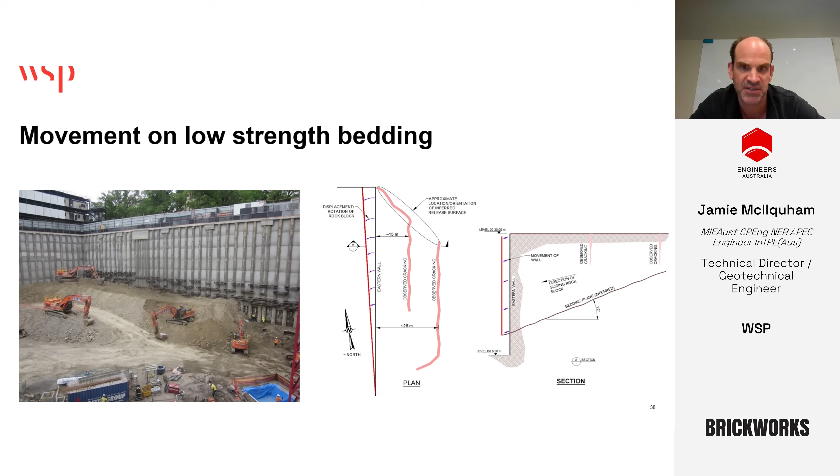It was identified in the left-hand image. You can see a buttress was constructed in order to stabilize that rock wedge, and additional anchors were then installed to provide sufficient resistance to hold that rock wedge in place.

So groundwater issues that can occur: this project was a site in an alluvial floodplain quite close to a river. A sheet-piled excavation didn't achieve cutoff into a clay layer, and as a result there was piping and sand boiling at the base of an excavation, about 10 meters below existing ground level, with a relatively shallow groundwater level.

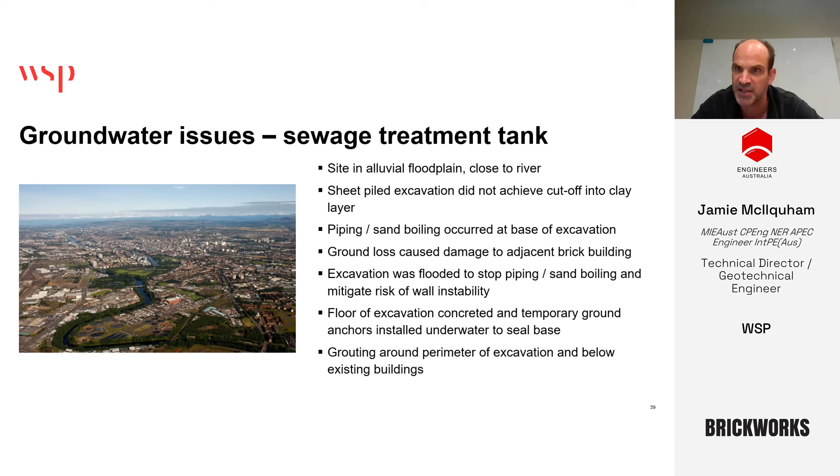That boiling, or inflow into the excavation, led to ground loss and damage to an adjacent brick building, and the excavation had to be flooded to stop the instability and prevent sand boiling. Fairly significant remedial works were needed: the floor of the excavation was concreted and temporary ground anchors installed to help stabilize the base, and a significant amount of grouting was needed around the perimeter of the excavation to help restabilize those buildings.

A similar example from a contiguous secant bored pile project. Again you can see the sand boiling in the left-hand image, and this was a situation where there was insufficient embedment, or insufficient weight in the base of the excavation left, and pressure on a clay layer that led to loss of the base and remedial work being needed.

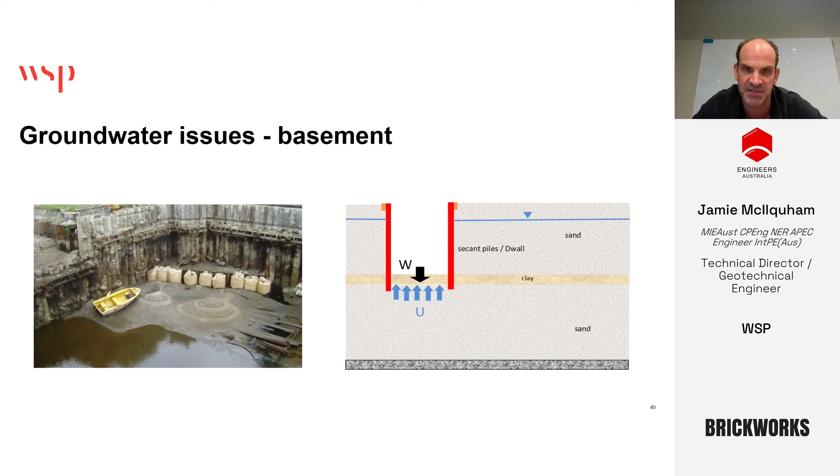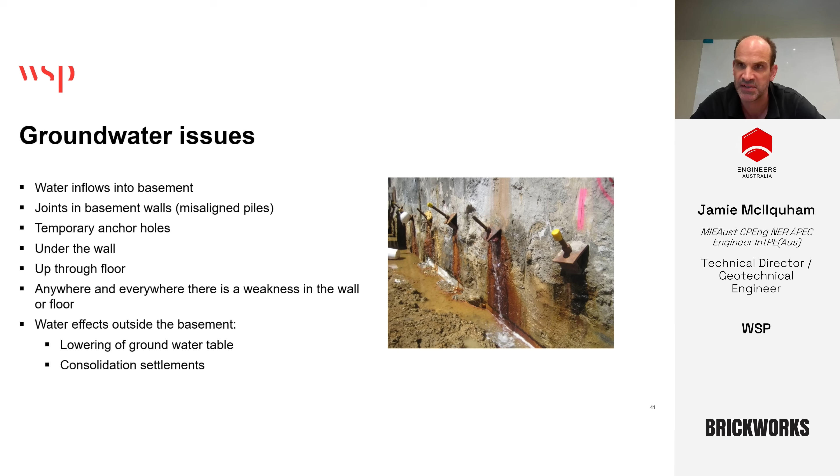More broadly, as we touched on with verticality, water inflows into basements are problematic. Water will tend to try and find its way wherever it can, through temporary anchor holes, joints in wall piles, anywhere there's a weakness in the wall. That can lead to effects within the basement in having to manage that water, the visual impact we touched on earlier, but also impacts outside the wall, such as lowering of the groundwater table leading to settlement of adjacent buildings.

So some closing comments. Retaining wall failures are common. It's usually because of poor choice of the type of wall being used. It might be optimistic or incorrect design, lack of knowledge, potentially poor construction. It occasionally can be catastrophic. We had some pictures on the cover slides and also the old dock that collapsed. They're thankfully rare,

but the consequences that we're dealing with are high. So it's very important to understand the geological setting we're working in, how the groundwater conditions are going to respond, and what's around you. So if you're in an urban environment, there's a very good chance you have nearby properties, nearby services. So protecting those existing assets is really important in picking the retaining wall options you're using.

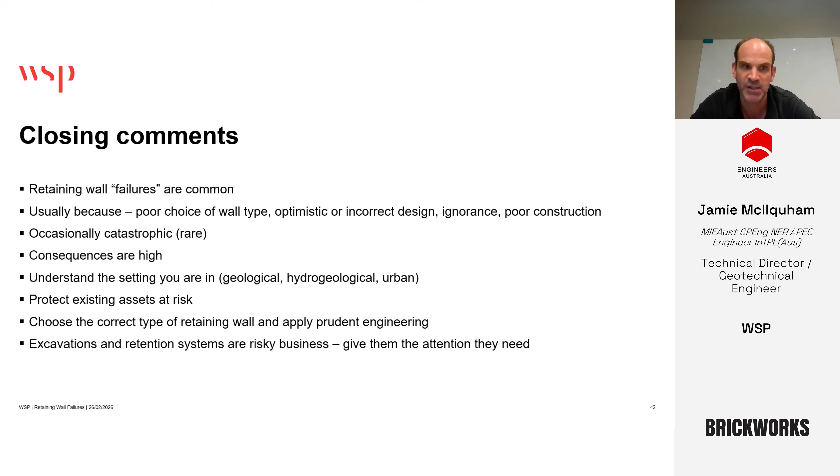Choosing the right type of wall is important. Being prudent in doing that and giving good advice to clients to make sure that their expectations are achieved. And overall, it is a risky business, so please give them the attention that they need. Thank you very much.